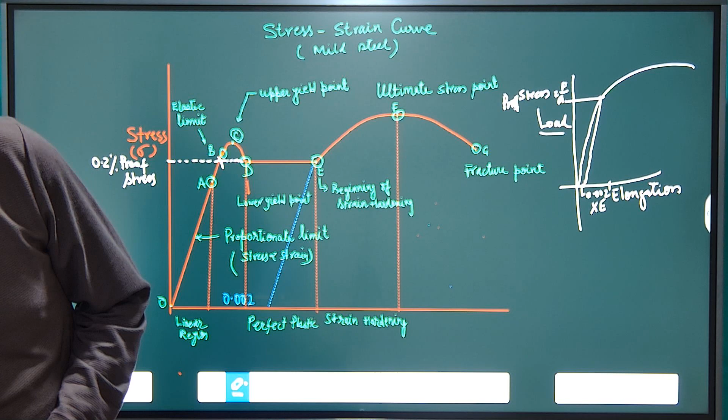हम लोग हाई स्ट्रेंथ डिफॉर्म्ड स्टील दैट इज यूज्ड इन कंक्रीट स्ट्रक्चर के बारे में स्टडी कर रहे हैं। IS 1786 2008 में डिफरेंट ग्रेड की रिबार होती हैं, जैसे Fe415, Fe415D, Fe500, Fe550D एक्सेट्रा। उनकी मैन्युफैक्चरिंग कैसे होती है, किल्ड स्टील क्या होती है, सेमी किल्ड स्टील क्या होती है, उसमें मैक्सिमम मात्रा में कार्बन, सल्फर, फास्फोरस कितना होना चाहिए, यदि इनकी क्वांटिटी ज़्यादा या कम है तो हाउ दे इन्फ्लुएंस द प्रॉपर्टीज ऑफ rebar। All this we had studied in our previous video.

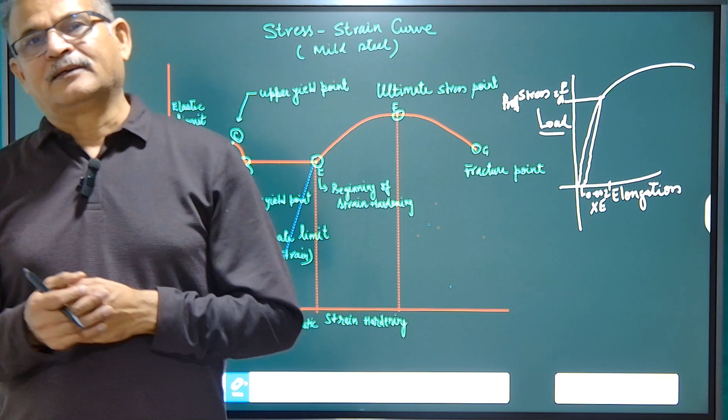Now in this video we will be studying about the physical properties of the rebar steel, जिसमें elongation, yield stress, ultimate stress, ये सब के बारे में हम लोग स्टडी करेंगे। जैसा कि हम लोगों को पता है कि डिजाइन इंजीनियर्स यूज द yield stress property of the rebar for calculating the quantities in their design। कितनी मात्रा में स्टील का किसी भी स्ट्रक्चर में यूज होगा, उसका यील्ड स्ट्रेस के ऊपर में ही उसकी कैलकुलेशन करते हैं, जैसा कि इसके फैक्टर ऑफ सेफ्टी भी 1.15 के बराबर लेते हैं।

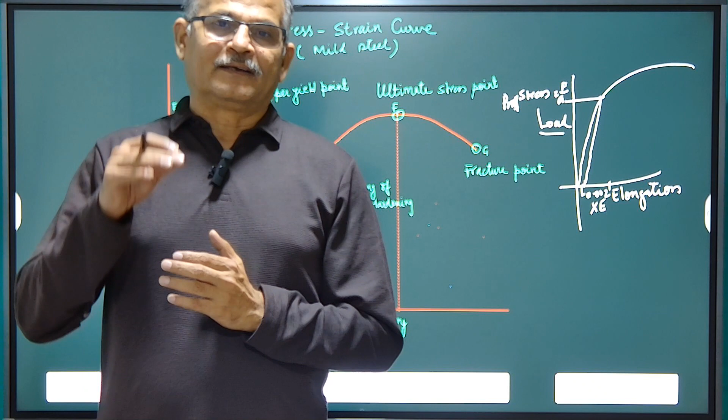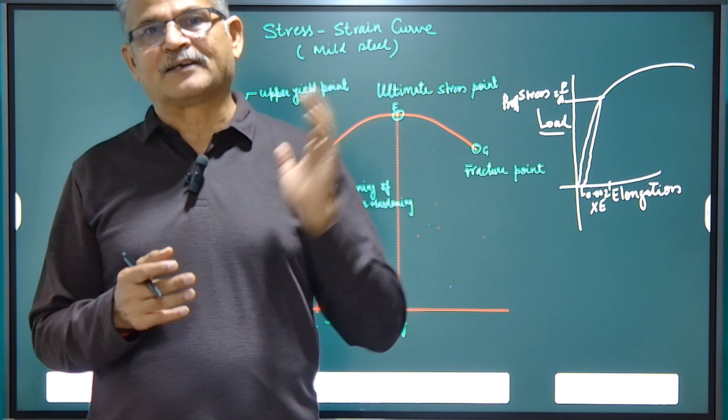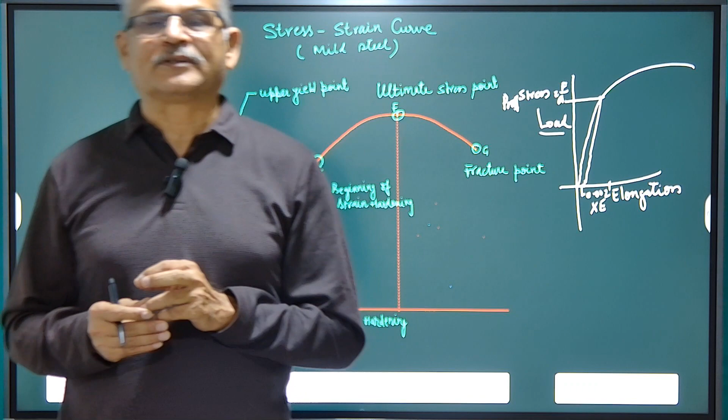अब इसमें चूंकि स्टील लो कार्बन स्टील है, जो रिबार है लो कार्बन स्टील है, इस पे डिफाइंड यील्ड पॉइंट नहीं होता है, जबकि माइल्ड स्टील केस में अपर यील्ड पॉइंट, लोअर यील्ड पॉइंट सभी डिफाइन होता है। सो स्ट्रेस स्ट्रेन कर्व के बारे में हम लोग स्टडी करेंगे कि हाउ द स्ट्रेस स्ट्रेन कर्व इज फॉर द माइल्ड स्टील एंड हाउ इट इज फॉर द लो कार्बन स्टील एंड हाउ टू फाइंड आउट द प्रूफ स्ट्रेस।

So this is the stress strain curve for the mild steel. In this mild steel exhibit all the properties like what is upper yield, what is lower yield, what is ultimate stress point. All these are well defined in the case of mild steel, but in the case of aluminum, copper, low carbon steel, it is not defined.

So for that we need yield offset, where the rebar behaves up to yield stress, and after that it goes into the plastic deformation. So all this we will be studying in this video.

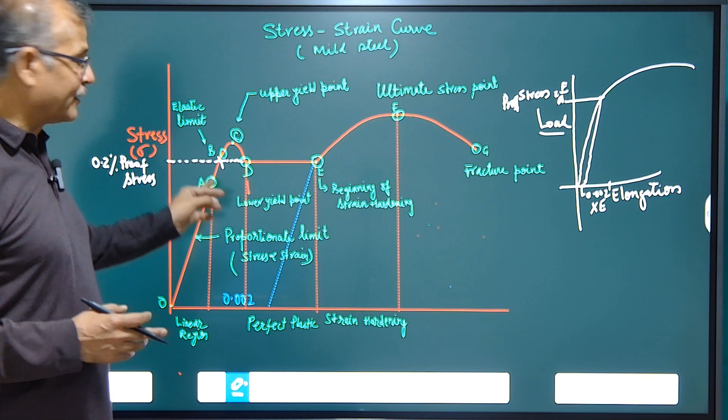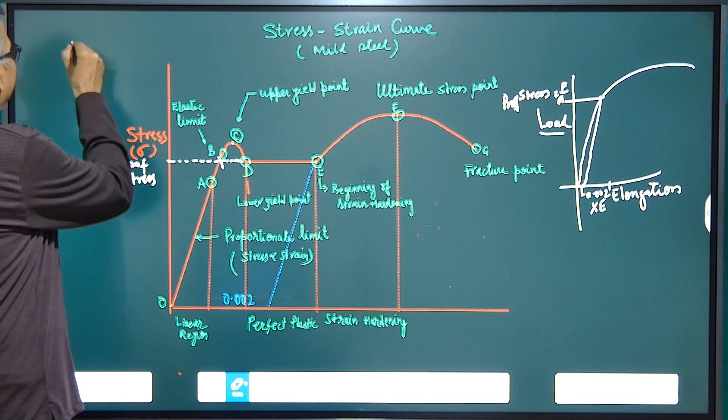So for the mild steel, from O point to A point, this is in proportional limit from point O to A, where the stress is proportional to strain. इसे मॉडुलस ऑफ इलास्टिसिटी भी कहते हैं। स्ट्रेस बाई स्ट्रेन इज ए ई, मॉडुलस ऑफ इलास्टिसिटी E इक्वल टू stress over strain in OA region.

Means once load is removed from the specimen, it will regain to its position. But O to AB up to B, where even though elongation is more, once load is removed, specimen will regain its original shape.

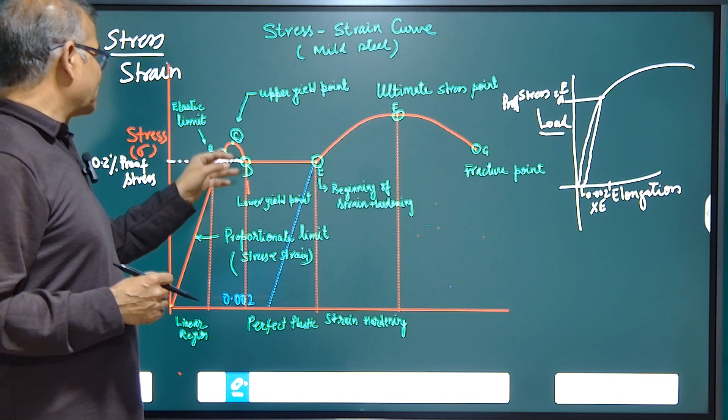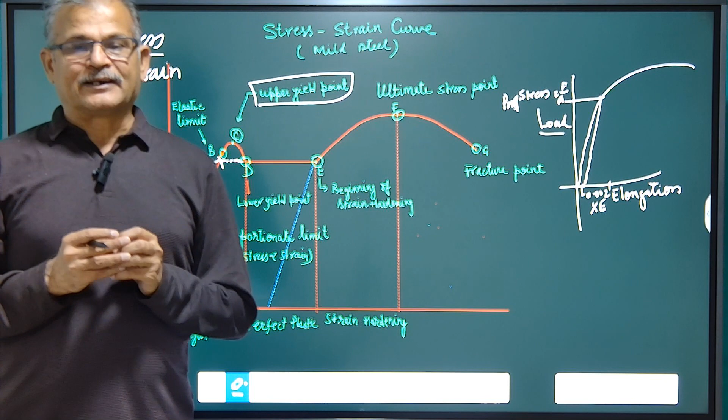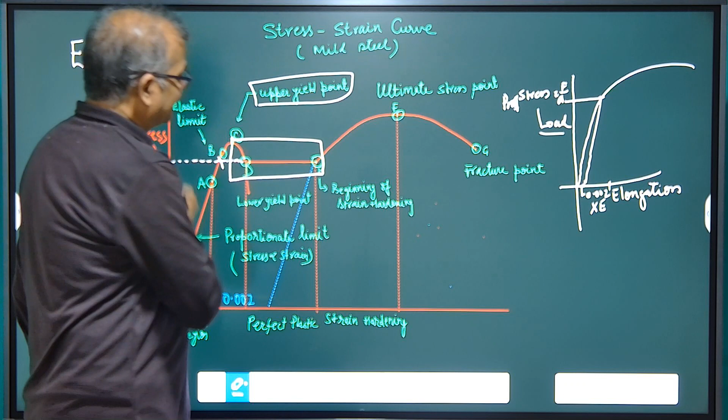But at point C, which is upper yield point, after this, once we apply the load up to upper yield point, after the upper yield point, the material will not regain its shape. It will be in the permanent deformation. So in this region, upper yield to lower yield, it will be in the permanent deformation. After that, strain hardening will happen.

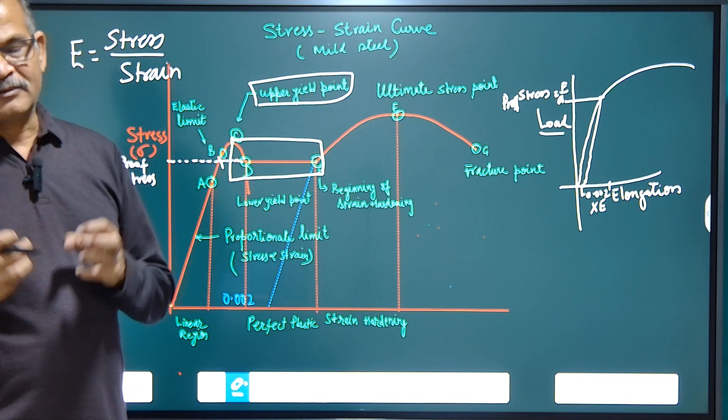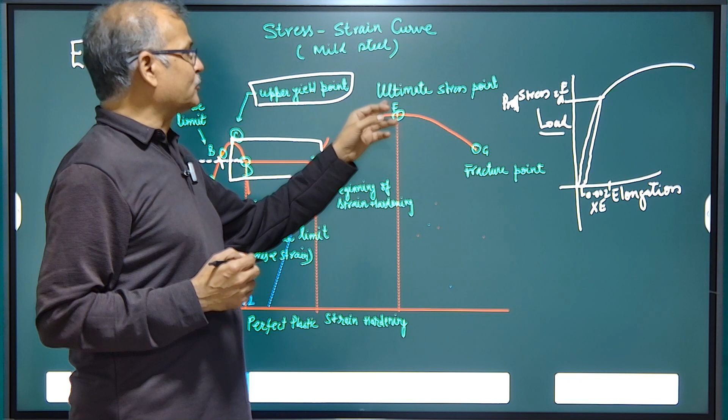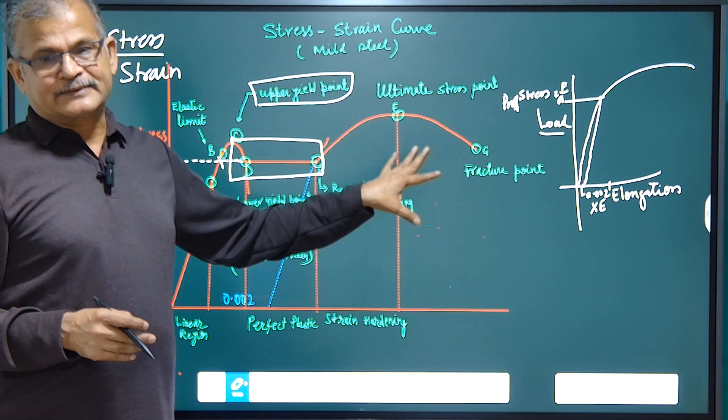The molecular structure of the steel will rearrange themselves, and against the load they will act. So it will take more load to deform, but the elongation will be more. So in the region of strain hardening, their load application will be more, and then it will reach to the ultimate stress point. After that, the loading will be reduced, and ultimately it will break and fracture. So all this is a stress strain curve for the mild steel.

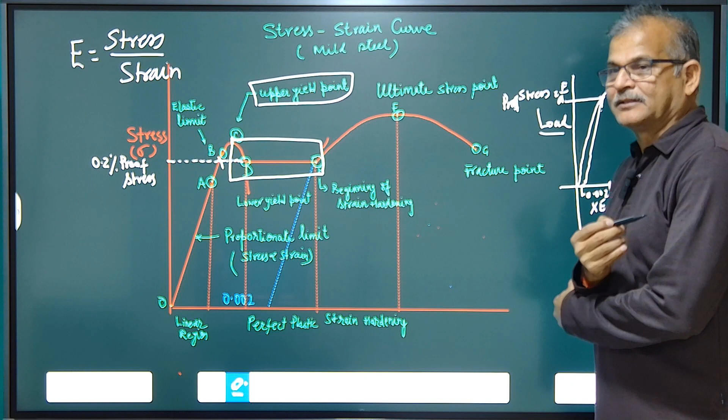Now for the high carbon steel, this particular yield point will not be defined. There will be about 0.5% drop in the load, but sometimes it is not visible. So the yield point will not be defined, and the graph will proceed like this, and ultimately it will fracture.

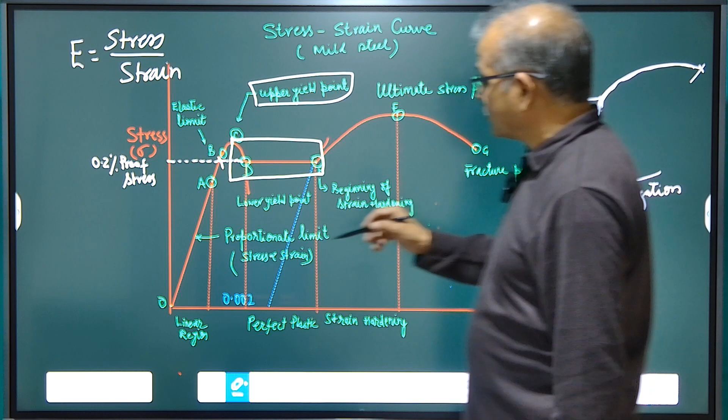So how to find the yield stress point, which is required for the design purpose by the engineers. Design engineers are interested to know what is the yield stress point. So this is obtained by 0.2% proof stress.

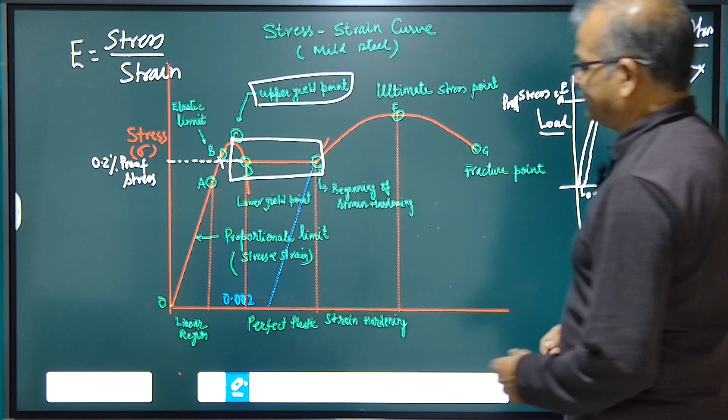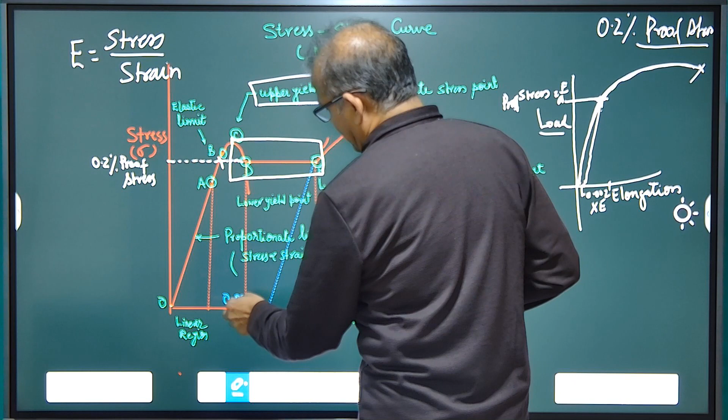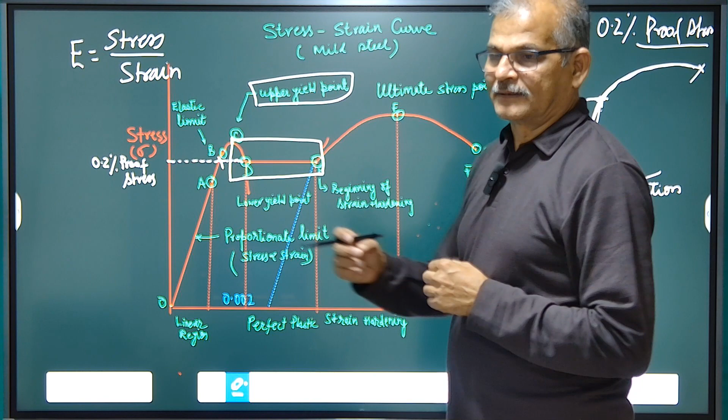And how to find this proof stress? Now, if we see in this graph, this region from upper yield point to lower yield point are beginning of strain hardening. The quantity is 0.002 times of the elongation. Whatever material is there, when it is stressed, about 0.002 times of its length, if we put it in the tensile machine, if this is the specimen and if this is the 500 gauge length...

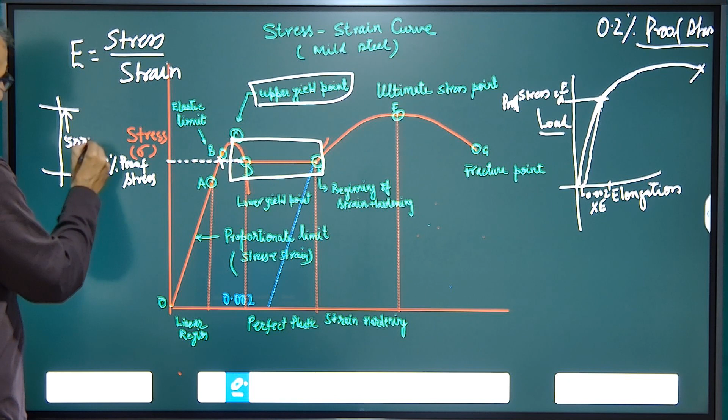When we apply the tensile force up to 0.002 times, means 500 into 0.002, say about 1 mm, in this region it will be about 1 mm straight. Then it will go into strain hardening position.

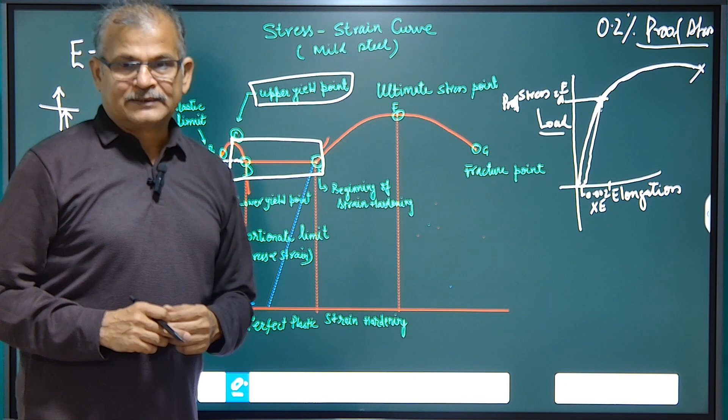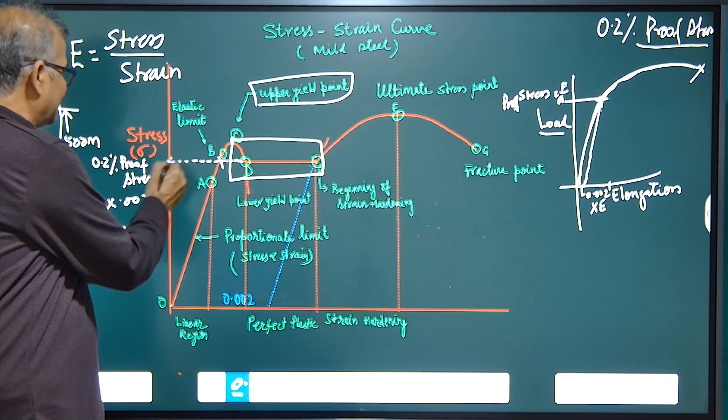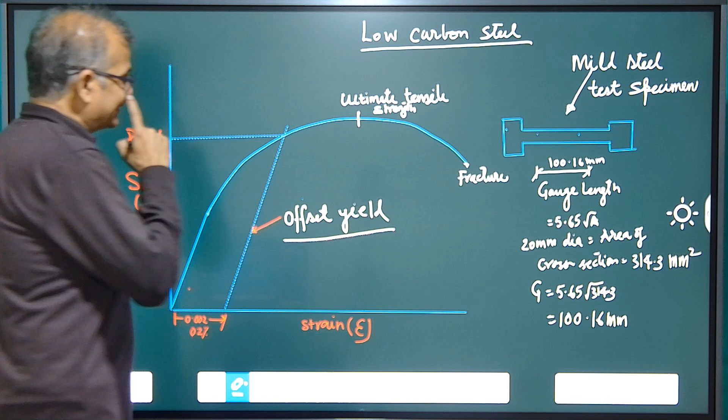So this is the 0.2% proof corresponding to this load. The load is known as the proof stress load. Now in this graph we can understand very well. This is the graph for low carbon steel, in which yield point is not defined, but we need the yield point where the material has yielded, means yield point.

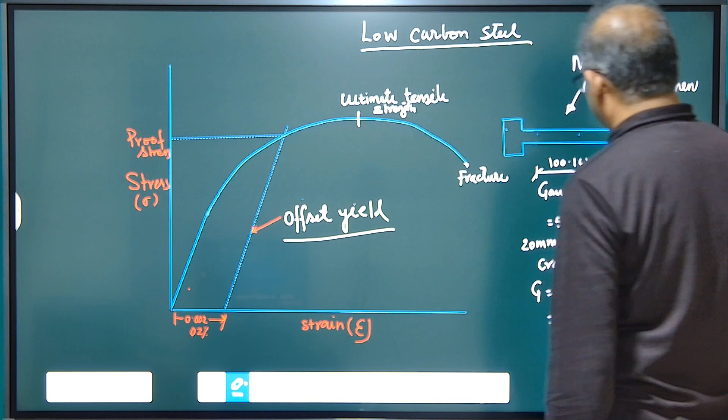After that it will go to the plastic region. Up to yield point, stress will be almost proportional to strain. So we are interested to find out what is the yield point of this. For that if we take this expression and mark the gauge length as given in the code, 5.65 root A, and this is the gauge length for 20 mm dia steel.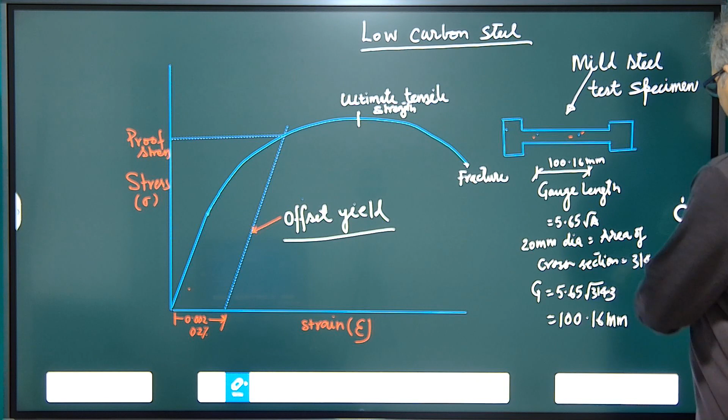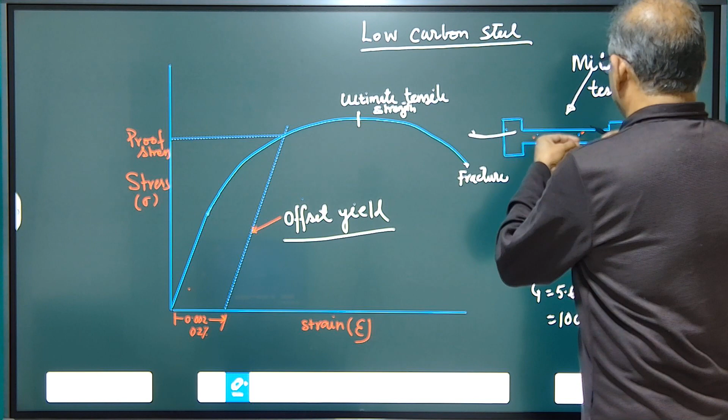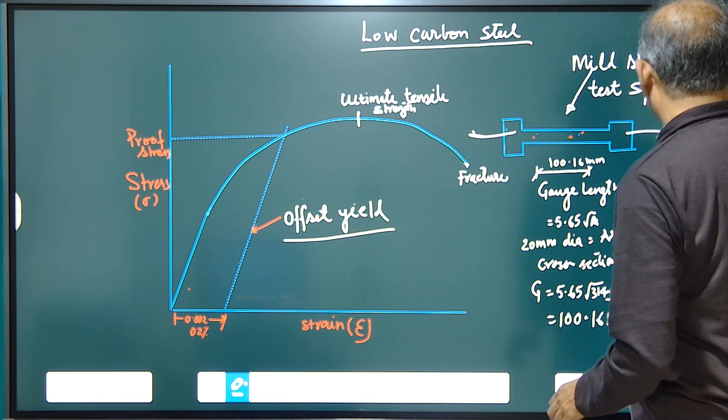Area of cross section is 314.3 mm square, and gauge length will be 100.16. If we take this expression into the UTM, and stretch this particular specimen to 1 mm, with gauge length 100, that is 0.002 times of this gauge length 100, about 0.2 mm.

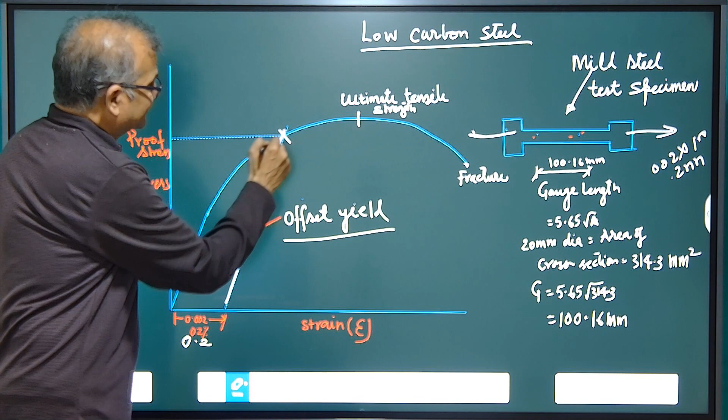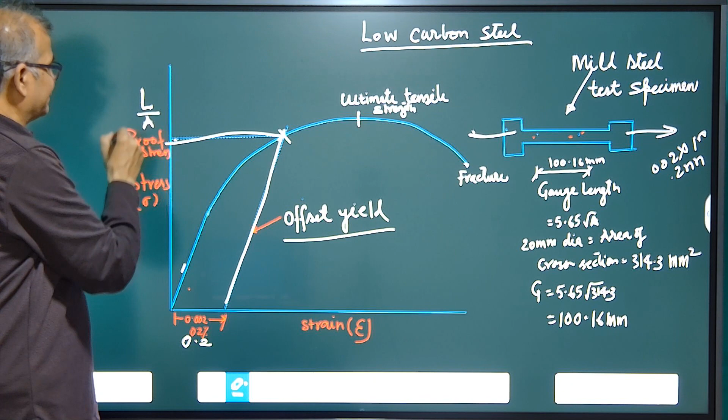After taking the reading, we draw a line parallel to this strain curve line, and wherever it intersects with the curve line, we take the corresponding load, divide by its area of cross section, and we get the proof stress. So after getting the proof stress, that is used in the design wherever the yield is not well defined; there we use this 0.2% proof stress.

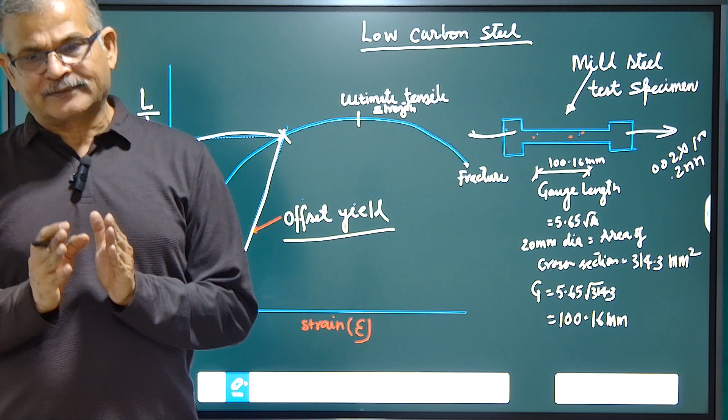Proof stress is nothing but the permanent deformation, where permanent deformation takes place in the steel while taking the load. That is the yield stress, and that yield stress is being utilized for the calculation purpose in the design. So with this we have completed the proof stress of steel, and after that we will be taking up the physical properties. Thank you.